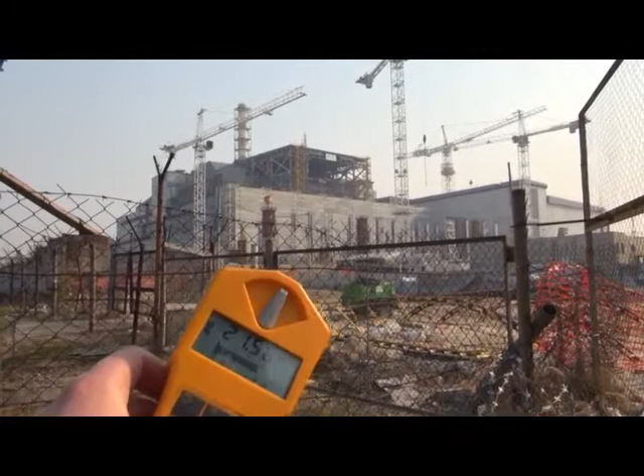This is the construction site of the new safe confinement. That wall you can see over there, 27 meters high, is specially constructed for the protection of the personnel of Novarka from radiation, because they were too close to the sarcophagus. It's, we may say, Novarka's know-how, because it is not written in the project design, and they decided to do it by themselves. Naturally, they agreed with Chernobyl NPP on this wall, or the construction of this wall, because Novarka signed the contract with CNPP. Of the buildings, they prepare the place for the technological or processing building. It will be necessary for the future operation of this new safe confinement, the arch, so to say.

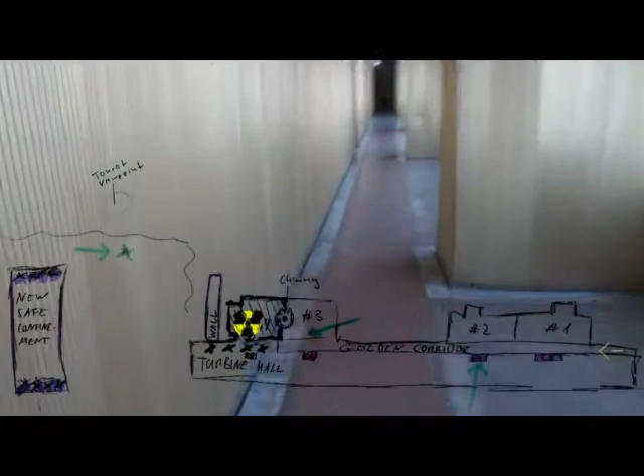Right on, let's go inside. This is where we're standing, with that wall, and behind that wall, the blown reactor of Chernobyl. This is where we're currently walking, the Golden Corridor, and onto reactors 1 and 2. You can see that the Chernobyl reactors are pretty much double units, Unit 1 and 2, and Unit 3 and 4 as a block. And just below, the turbine hall and control room.

So this is the so-called Golden Corridor, because of these yellow wall pillars. It was covered after the accident.

So, for you to understand, the left side is the side for the control rooms. For Unit 1 first, then central control room, then Unit 2, and then over there Unit 3 and 4. To the right, this is level 9.2, and the reactors are on the level of 20 meters to the right.

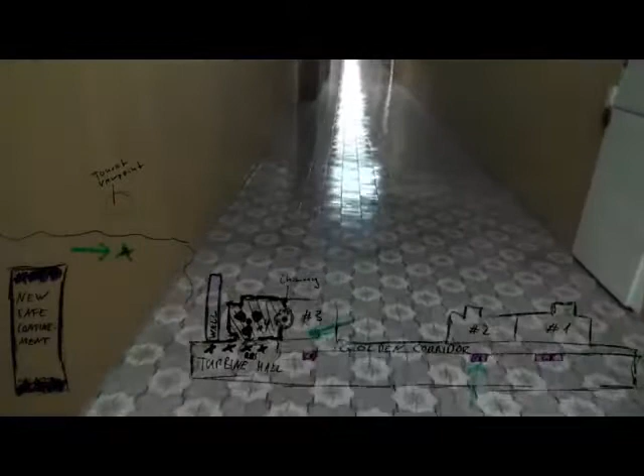Behind the control room, behind this wall, then again a wall, then behind that there is a turbine hall. The turbine hall for CNPP is without any separation walls. It is whole, for each unit, 2 turbines when CNPP was in operation. The power of one unit is 1000 megawatts.

So this is the central control room. Here is the shift supervisor of CNPP. I came to CNPP after the accident. It was 25 years ago.

So our place of visit is control room of unit number 2. Just we will call there.

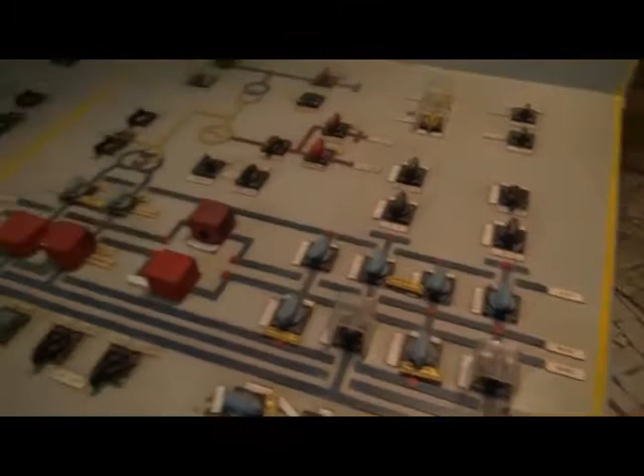All the control rooms of the units are the same, so this is the way it looked in unit number 4 too. So there are 1, 2, 3 boards. This is the board for the senior engineer or senior operator, how to say it, for turbines. This man was responsible for the operation of turbine, reliable operation of turbines. TG4, TG3 - turbine number 3, number 4.

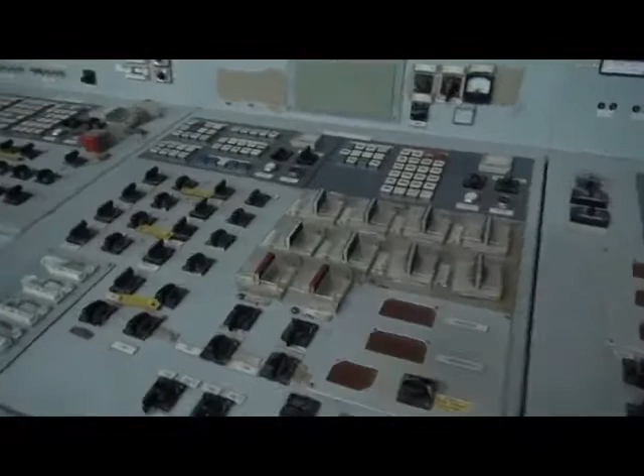It's unit number 2. Unit number 1 is turbine number 1, number 2. Then, here is the working place for the engineer who was responsible for supplying the reactor with water, oil, and other things. And this board is for him.

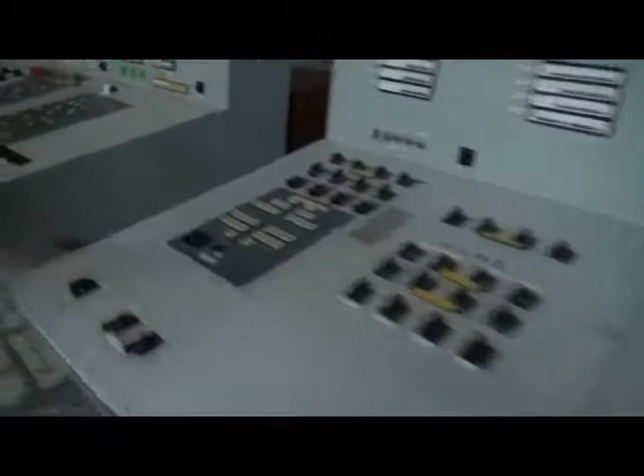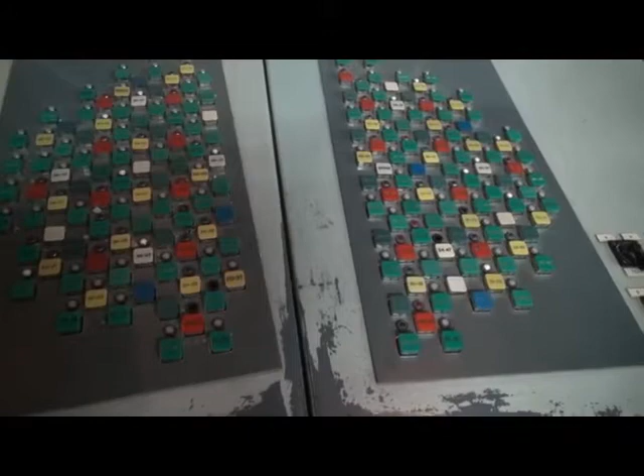Nowadays in the turbine hall there is the process of dismantling of equipment - so that's what they are doing, huh? Yes, because of decommissioning, since Chernobyl nuclear power plant is now at the stage of decommission.

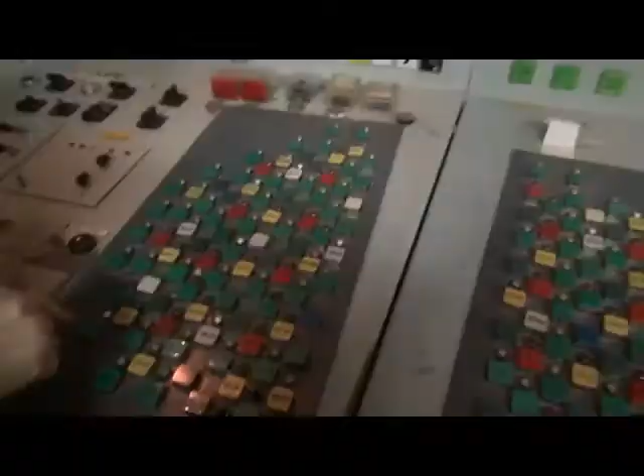You can see these numbers - this is the number of the channels. In each channel, there is the fuel. The total number of fuel assemblies is 1,693. The total number of all the channels is 2,488. And the total weight of the fuel is 200 tons.

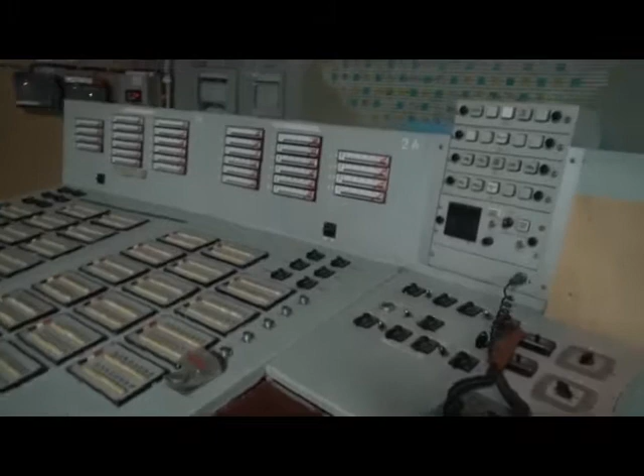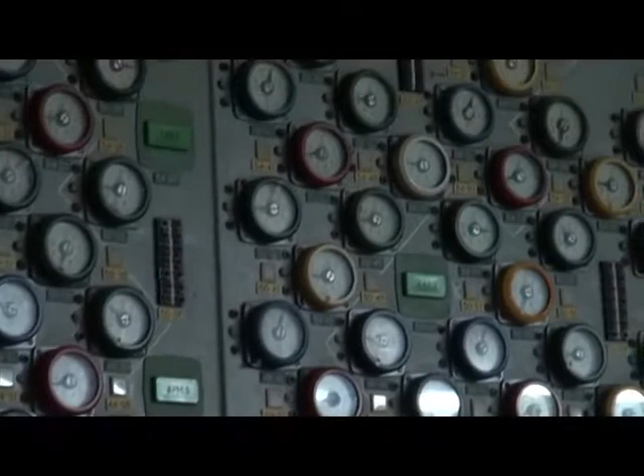When we wish to change some channel, the operator has the information here also on these sensors, and he gives the command to the central hall, and he coordinates with the shift supervisor, because the fourth man here is the shift supervisor of this unit. They prepare the fuel, meaning the fuel should be in the central hall, for the refueling machine.

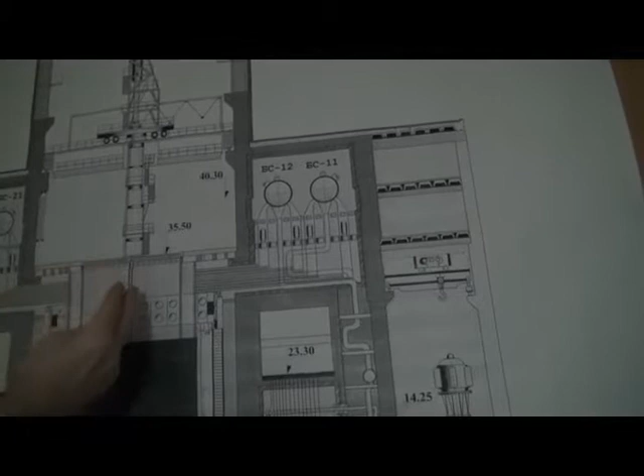You can see the refueling machine. With the help of this machine, they load the fuel assembly inside. Then they move this machine on the channel. Before this, they open the plug.

The upper core and the refueling machine, there is a big spare place, and there is a big radiation. That's why nobody is there; the operators are in the operator's room. It's possible to do this during operation of the reactor, which is the advantage of this type of reactor. You can just take out the spent fuel and put new fuel in without needing to stop the reactor's operation.

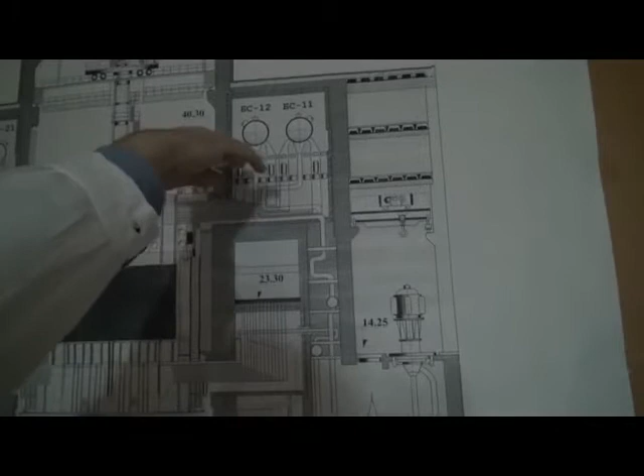The spent fuel, first of all, they put it in the pool, two pools here on both sides, like this, and they put it inside the water. The fuel stays there for approximately 2 or 3 years.

It's better to see it when the reactor was in operation, but just now it's impossible. I can't show you, but sometimes I saw the operators - he knew everything, everything, like this.

They continued to run the other reactors, with everything around being contaminated from Unit 4 exploding all over the place, until the year 2000 - that's 14 years after the Chernobyl accident. Until that very day, the reactor right next to it, Unit number 3, was in full operation.

We found one of these displays in Chernobyl 2, the Duga array. What was this panel? Yes, exactly, it's the same - that's why I was wondering what they use it for. And here are Nixie tubes - did you see them? Very nice.

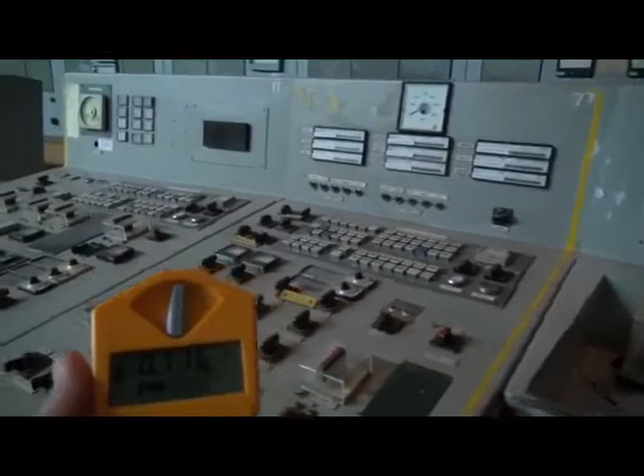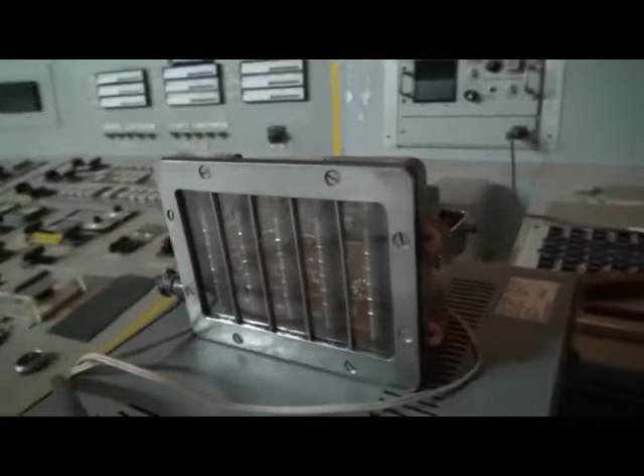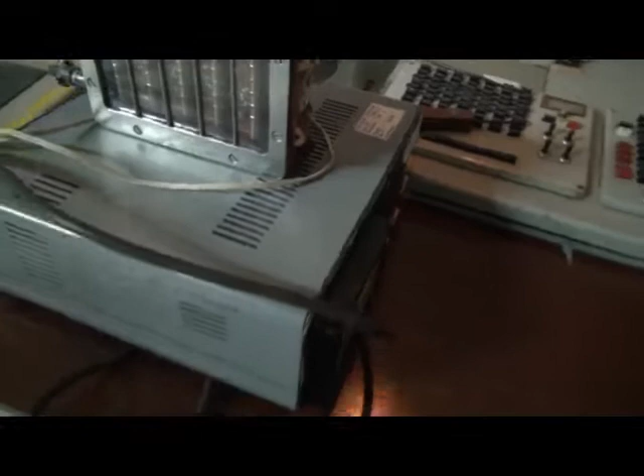Just in case you were wondering, this control room is pretty clean, only about 3 times normal background radiation. But what was that thing on the table? Well, it's like a surface contamination check monitor. Pretty sensitive if it measures in counts per second. Quite cool - still in perfect working condition, same as their dial plate telephones.

Let's leave Reactor 2's control room behind and move on down the golden corridor. This might just be the collection point for the Pripyat laundry. Cool.

Oh, it's a little more radiation here. So we are going now closer to unit 3 and 4. Yes, I can see that on the dosimeter - that's why the dosimeter works more intensely.

That building is for unit 3. Oh, the train, yeah.

Fuel storage over there, fuel storage on the territory of CNPP. It was commissioned in 1986. Is there still fuel inside? Yes, now, that's why there are people working. 21,000 fuel assemblies are inside now, because all the reactors are empty now - they just put it all in there.

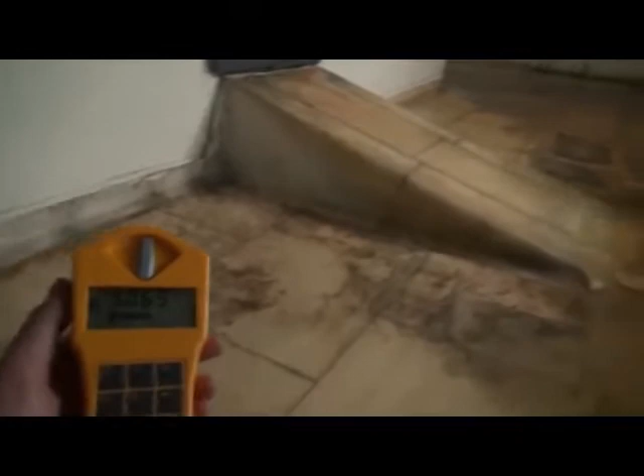So unit 4's apartments, the premises, are behind this wall.

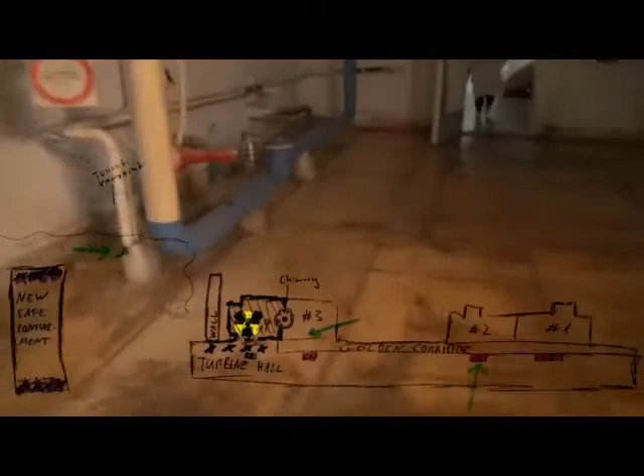Just in case you're wondering, we're now walking towards the pumping station between units number 3 and 4.

So this is the memorial, so-called, to Valery Khodemchuk. He was the senior operator of the circulator. During the accident, he was given the task to go check his equipment at the circulating pumps, and at the same time the CNPP personnel started testing the equipment - that so-called experiment. Unfortunately, the accident happened and Valery was there because all the equipment, the pipes and so forth, collapsed down. Unfortunately, he wasn't found. After the accident, there was an entrance here from Unit 3 to Unit 4, which was closed, and we decided to make it a memorial place here.

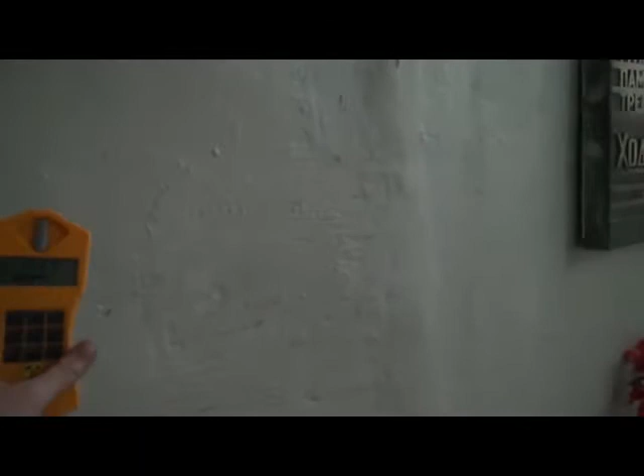Yeah, you can hear that it's closed. These are the pumps of unit number 3, but just beyond that wall, Valery Khodemchuk lies buried. 4 pumps here and on that side also 4 pumps; at the same time, 6 pumps were in operation. You see, they are very big - it's only the upper part we can see, because all other equipment is down.

Well, there's one little merciful thing about Valery Khodemchuk's terrible death here. In case he wasn't crushed to death instantaneously but was suffering with pain stuck under some debris, then he was killed after just a few hours because of the radiation. What a fucking terrible way to die. But at least it was semi-quick in any case.

The radiation levels are nowhere near dangerous anymore, but they're still quite high, so it's time to leave again. So this video is not about the beautiful wild zone that Chernobyl is nowadays, but about the dead zone it became back then, when a lot of people died. This shall be a memorial of those.